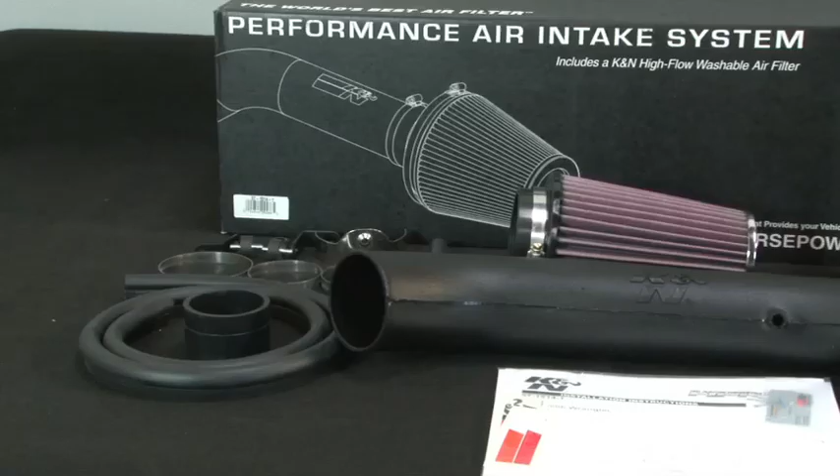This K&N air intake system is designed to increase vehicle horsepower and acceleration by reducing restriction in the intake path. The 57-1514-1 air intake has received a CARB EO number and it is street legal in all 50 states. This air intake system fits 1997 through 2006 Jeep Wrangler and TJ models with a 4.0-liter engine, in addition to other vehicles identified on the K&N website or catalog.

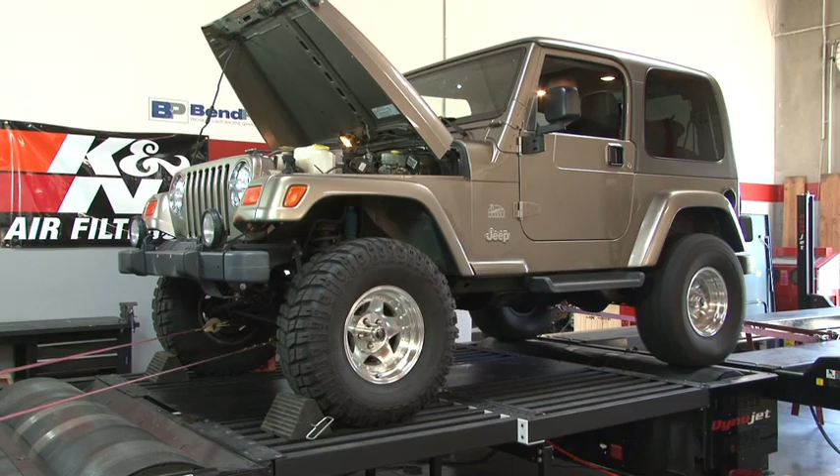K&N power testing showed an estimated power gain of 12 horsepower at 4,623 RPM with this air intake installed on a 1997 Jeep Wrangler with a 4.0-liter engine. Actual results will vary depending on the condition of the vehicle, mileage, weather, and other variables. With the air intake installed, we ran the vehicle on the dyno to test the sound comparison versus the stock intake.

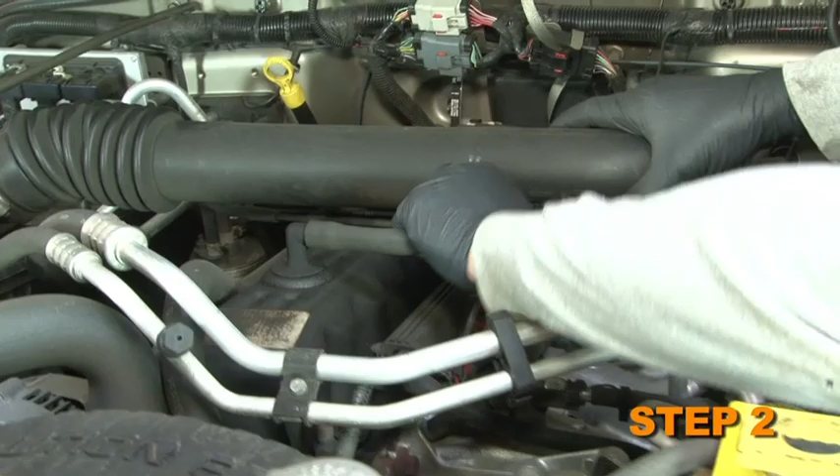The intake kit includes components that have been designed or matched to the needs of these vehicles to produce a safe horsepower increase. Detailed installation instructions are included with this kit. The tools needed for the install are shown. Turn off the ignition and disconnect the negative battery cable. Detach the crankcase vent hose from the stock intake tube. Loosen the hose clamp on the intake tube at the throttle body.

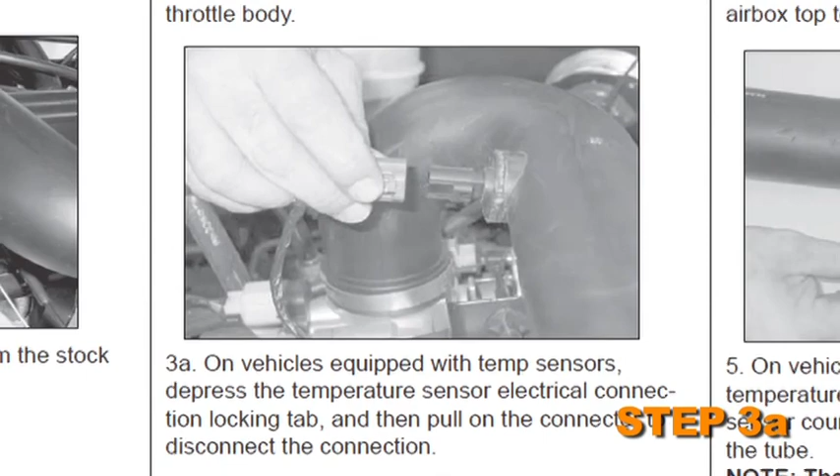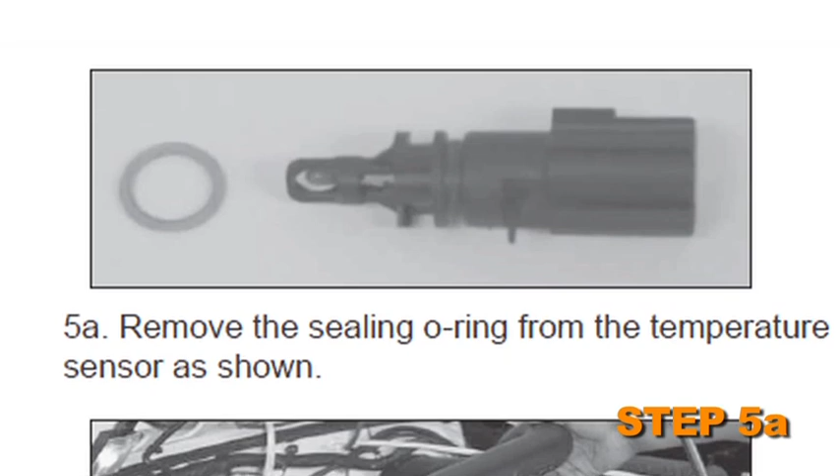On vehicles equipped with temp sensors, depress the temperature sensor electrical connection locking tab. Then pull on the connector to disconnect the connection. Release the 5 over-center clips that retain the airbox top to the airbox base. On vehicles equipped with temp sensors, lift the temperature sensor locking tab while twisting the sensor counterclockwise to remove the sensor from the tube. Remove the sealing O-ring from the temperature sensor. Detach the intake tube from the throttle body and remove the entire upper air intake assembly.

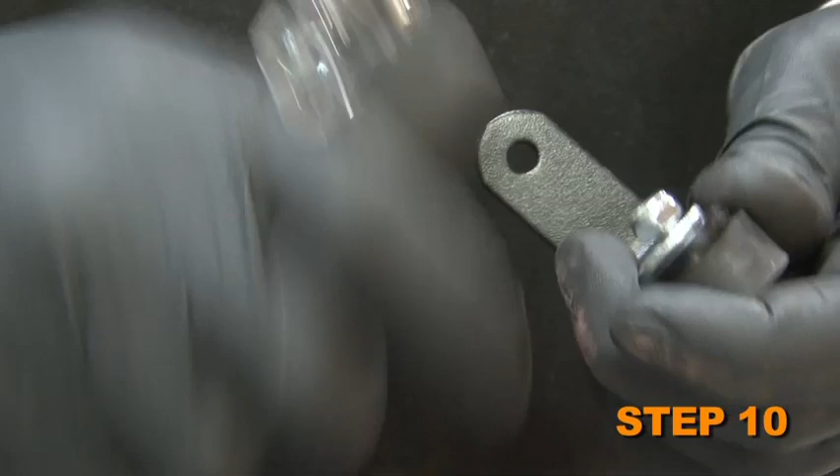Loosen and remove the 3 nuts that retain the airbox base to the inner fender apron. Remove the airbox base. Install trim seal onto the heat shield. Some cutting and trimming will be necessary to achieve best fit. Attach a rubber-mounted stud provided to the L bracket using the hardware provided, but do not tighten completely at this time. Loosen and remove the upper radiator shroud retaining bolt. Install the L bracket using the bolt removed in the previous step.

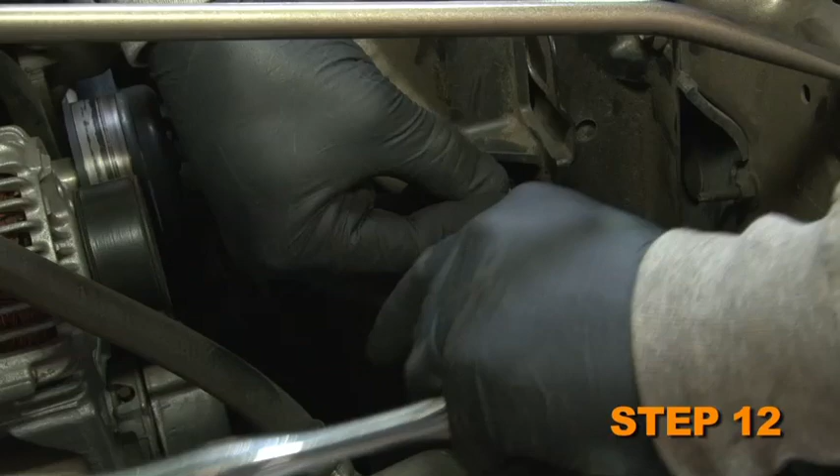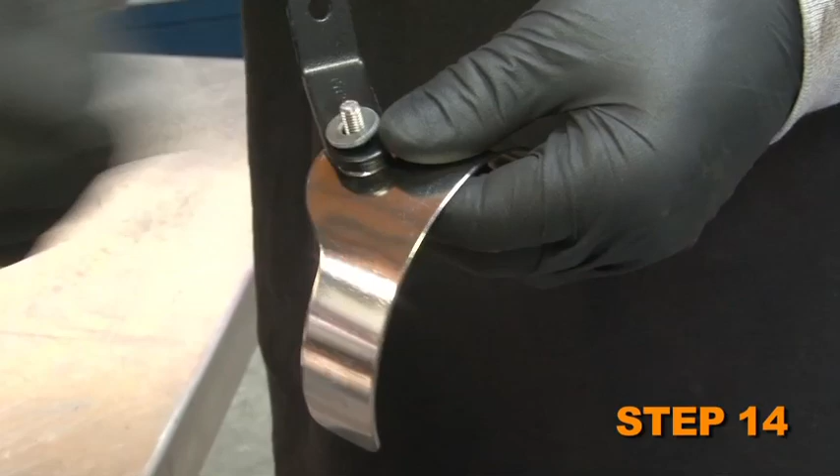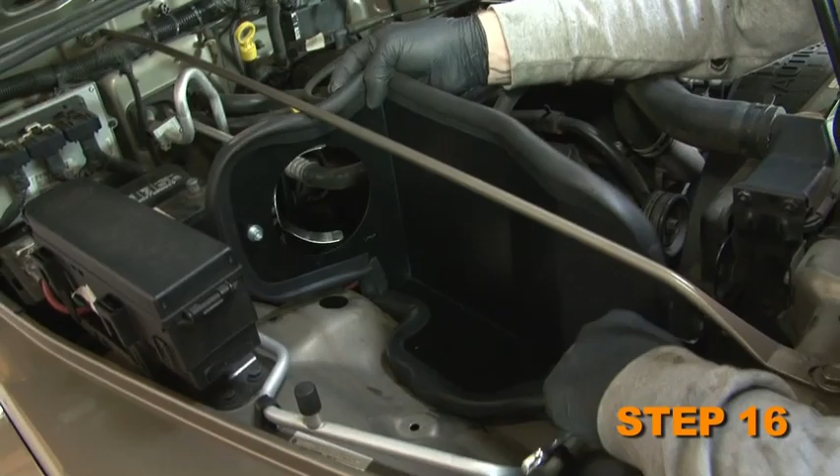Attach the second rubber-mounted stud into the lower airbox mounting point using the hardware provided. Assemble the saddle and L bracket using the hardware provided. Attach the saddle bracket assembly to the heat shield using the hardware provided, but do not tighten completely at this time. Install the heat shield assembly. Secure the heat shield to the rubber-mounted studs using the hardware provided. Attach the silicone hose to the throttle body using the provided hose clamp. Install the K&N intake tube.

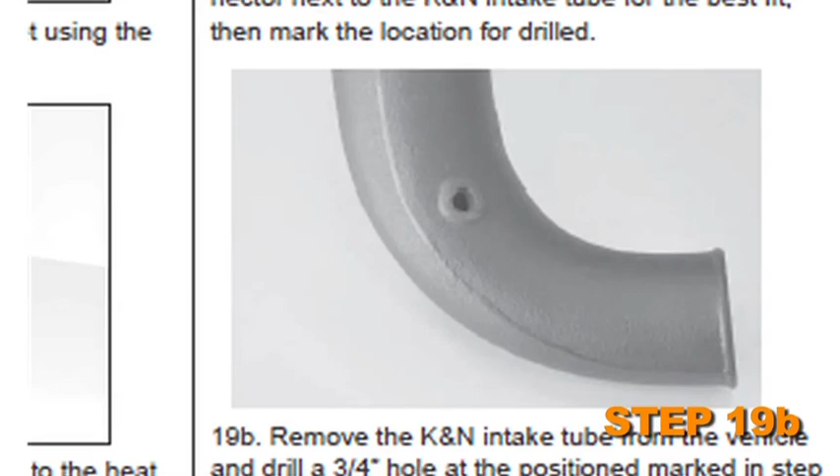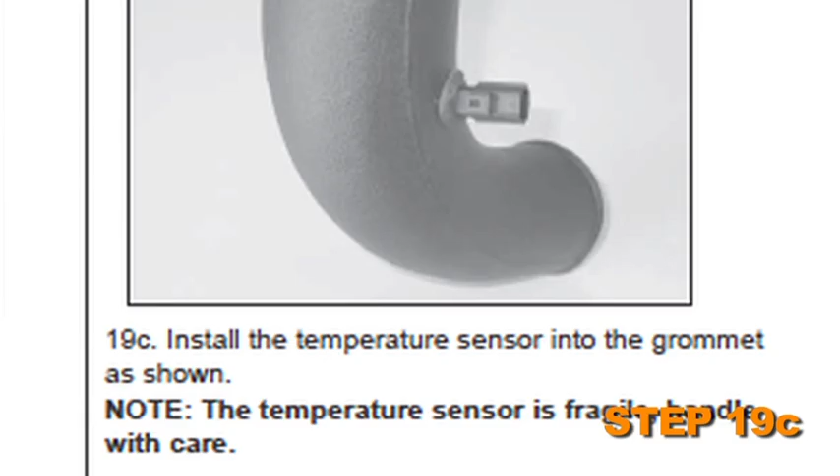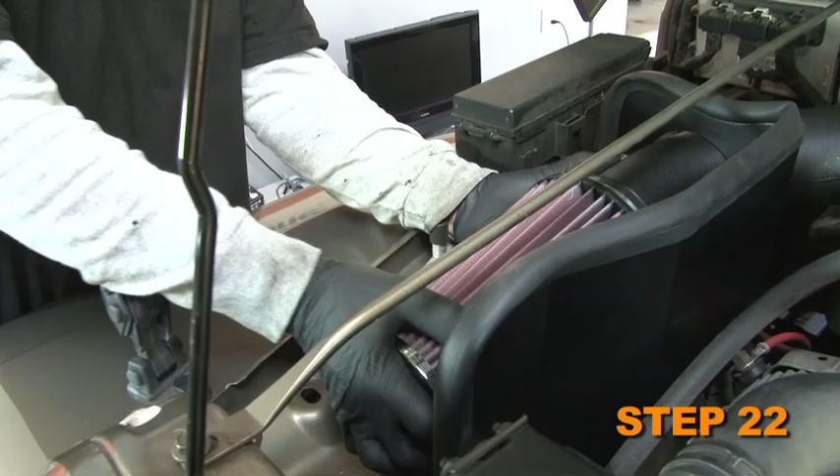On vehicles equipped with temp sensors, position the temperature sensor electrical connector next to the K&N intake tube for the best fit, then mark the location to be drilled. Remove the K&N intake tube from the vehicle and drill a 3/4 inch hole at the position marked in step 19A. Next, install the provided grommet into the drilled hole. Install the temperature sensor into the grommet. Secure the intake tube to the saddle bracket using the hose clamp provided. Tighten the hose clamp on the silicone hose at the intake tube. Then fit the air filter assembly onto the K&N intake tube and secure with the provided hose clamp.

Detach the crankcase vent hose from the vent fitting on the valve cover. Attach the vent hose provided onto the vent fitting on the valve cover and the K&N intake tube. On vehicles equipped with temp sensors, reconnect the temperature sensor electrical connection. Reattach the vehicle's negative battery cable. Double check to make sure everything is tight and properly positioned before starting the vehicle. The included CARB exemption sticker must be visible under the hood so that an emissions inspector can see it when the vehicle is required to be tested for emissions.

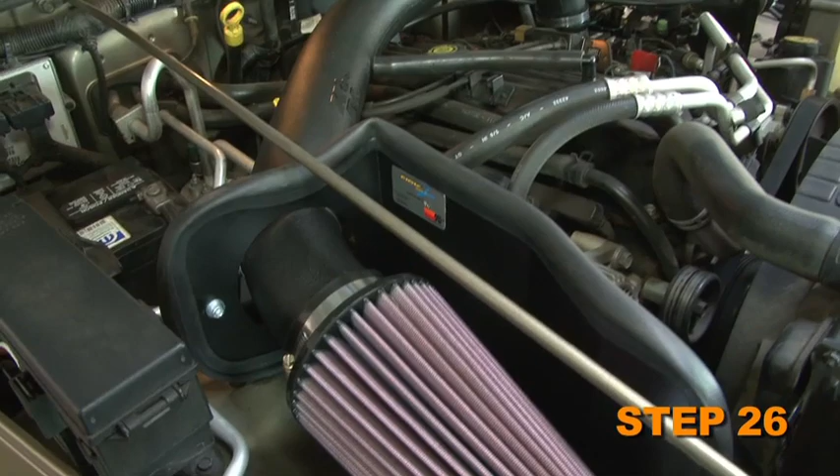It will be necessary for all K&N high-flow air intake systems to be checked periodically for realignment, clearance, and tightening of all connections. Failure to follow the above instructions or proper maintenance may void warranty.